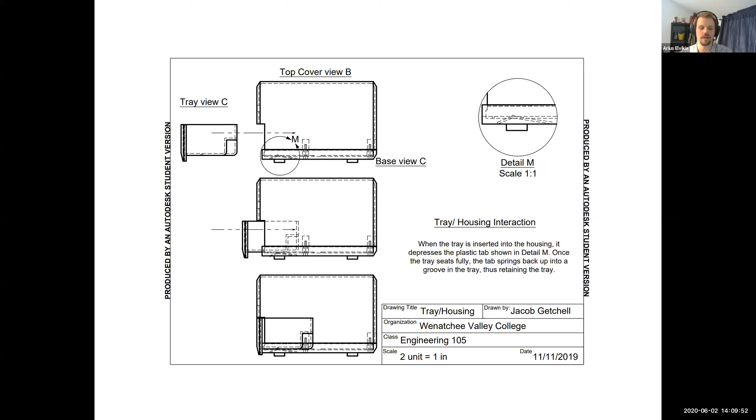So students learn what these different line types mean, and they learn how to generate these professional drawings that are kind of universal. It doesn't matter what country you're in or what language you speak, most anyone can look at a drawing like this and start to get a picture of what this pencil sharpener, in this case, will look like.

Other students are more interested in larger scale projects. Maybe they're interested in getting into construction management or architecture, the whole business of making buildings. And so you can use AutoCAD to do this.

Then most students who take that then proceed into our Engineering 106 course, which is parametric modeling, solid modeling. It's fancy words for saying 3D shapes and parts. So this is a mechanism a student built - he designed it from scratch.

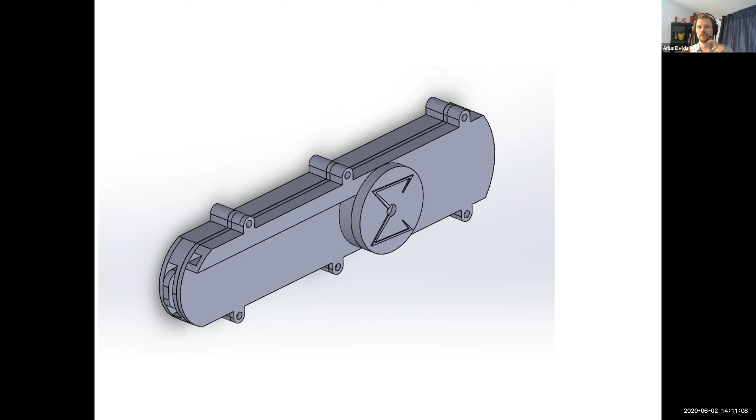He drew the blueprints in my Engineering 105 CAD class, and then when he learned these 3D skills, he built this mechanism, and it is supposed to be like a little plastic thing that you'd stick in your sleeve to shoot playing cards into your hand if you're trying to do a magic trick. So it's a design that he was working on.

He hasn't built it yet, so we don't know if it's going to work or not. But he came up with all these little sliding pieces and little gears with the hopes that he could design something like that. So that's kind of a fun application.

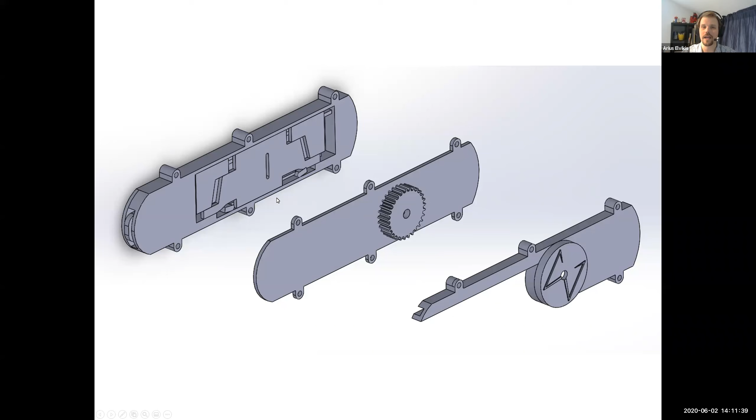But this software is very concerned that you are designing stuff that can actually be made, either by a 3D printer or by someone in a factory down the line.

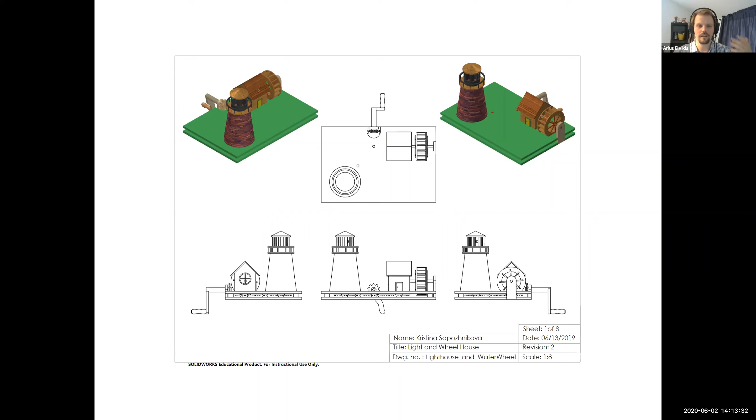So I'm showing you some fun examples and applications, and I try to open it up and let the students make whatever interests them. But we also have lots of other things that are a little more straightforward, little clocks or little turntables or little gear sets. The software lets you make whatever it is you're thinking about, and that's what I try to encourage.

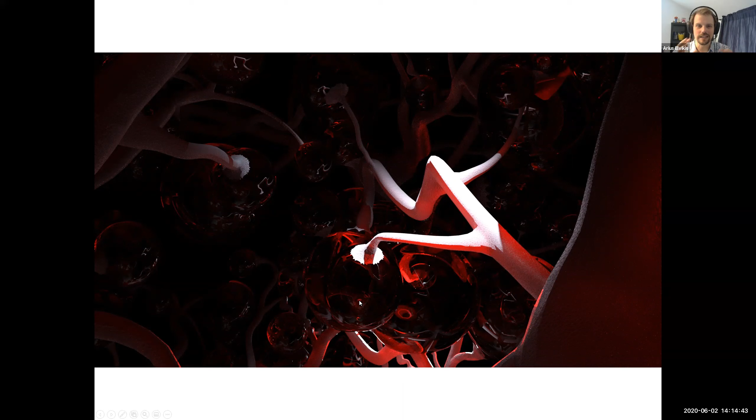The software can do all sorts of things once you learn how to use it and learn the tools that you want. So this is a bit more of a creative application of what we do.

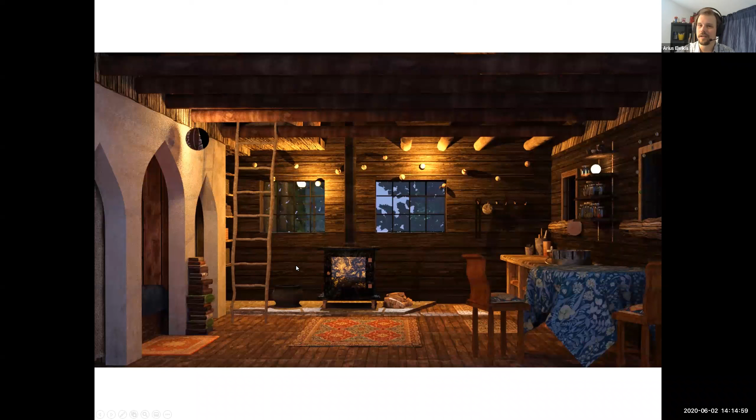This would be an example of something that's sort of halfway. Again, a very high-end student who had already taken a number of other art and design classes but didn't know the software at all at the beginning of the quarter. By the end of it, she rebuilt this kind of rustic witch's cabin with spices on the shelf, glass jars, and a little stove. Then you can see the logs in the roof and this rickety old ladder.

She built this entire virtual space that's half imagination, but also a little bit based on real cabin design and real architecture. Some pretty cool stuff, all of it using different sets of software that we work together to pull together.

My ultimate goal is that you as students can start to make the things you're thinking about or that you're trying to fix, design, or build in the first place. So that software is the first step, and I usually assume you're going to take that software and apply it to something you want to do, whether that's a future in architecture, 3D modeling spaces for projects, or little prototypes.

I've had students, one who built RC car parts in his garage as part of his side hustle, and he was able to use the software to make that process go better. Then there are students who are more interested in video games or animation. There's not a lot necessarily in that field here in Wenatchee Valley, but right over the mountains, that's where it happens.

DigiPen and the Academy of Interactive Entertainment, those places directly lead students into Nintendo and video game companies. So we can get you started and get some exposure to those software packages here at Wenatchee Valley College.

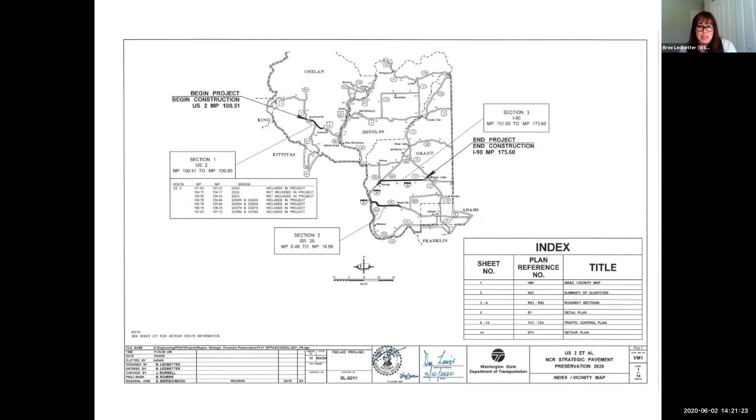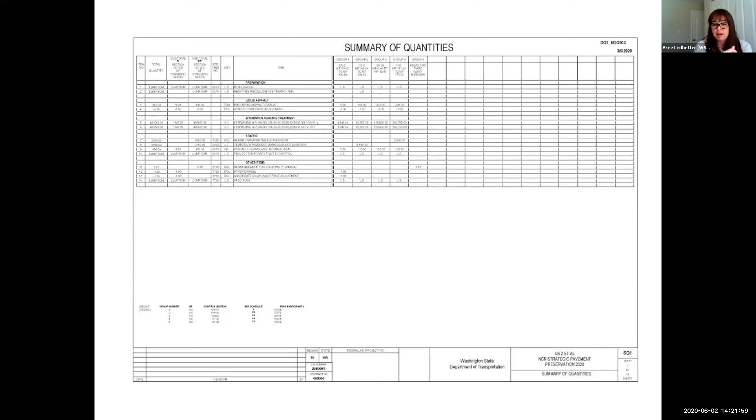The next slide in every plan set is something called a summary of quantities. This is where DOT has helped me grow my skills a little bit. I came in as a draftsman, but now we're putting together estimates for projects, and I'm learning not just to draw the plans but how to estimate quantities and what items are needed or not needed for each project. Our next slide shows some roadway sections.

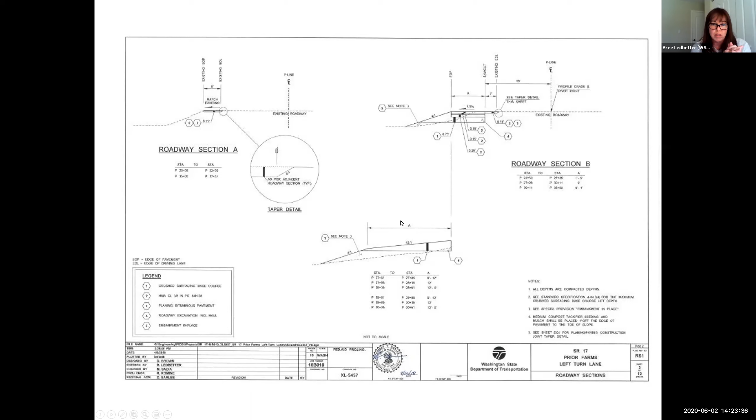What's the next one? This is going to be a site plan with a little more information. It shows all the existing roadway features, and some cut and fill lines if there's going to be anything on the side of the road they'll have to cut into, like the hillside or the ditch.

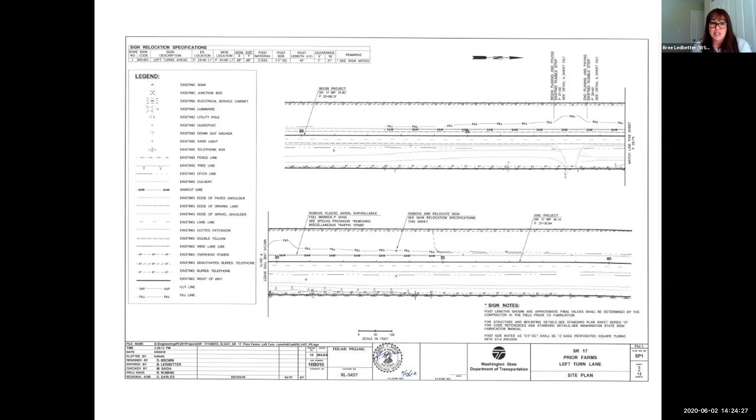Some of these plans will also show electrical stuff like buried fiber or utilities. We have different departments at the Department of Transportation — our traffic office does more of the electrical design for intersections, and then we have a survey office that goes out and gets information you can reference in your drawings.

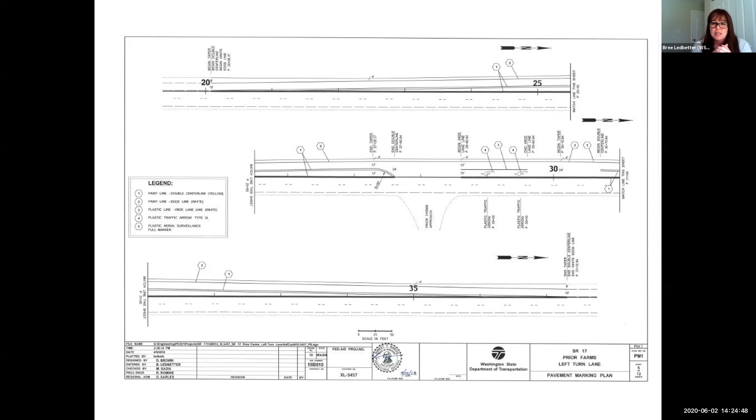I think the next slide might be electrical — oh, this is the pavement marking plan. This is also something the traffic office handles. There are different offices you can work in depending on your specialty. There are all kinds of drafting standards, and standards for what has to be out there when designing roads. This shows all the pavement markings and where they go.

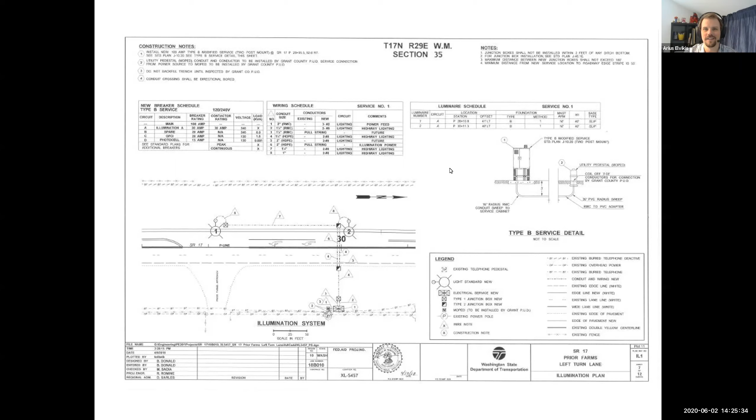The next slide, I believe, is the electrical illumination. Arius talked a little about electrical design — this probably isn't exactly what he did. Students taking electrical for us usually use CAD to do more abstract flow charts, like locating a capacitor or a resistor. But this is the civil application, where you have to think about where that conduit is actually going to run, and coordinate with all the other offices about where it's going and coming from.

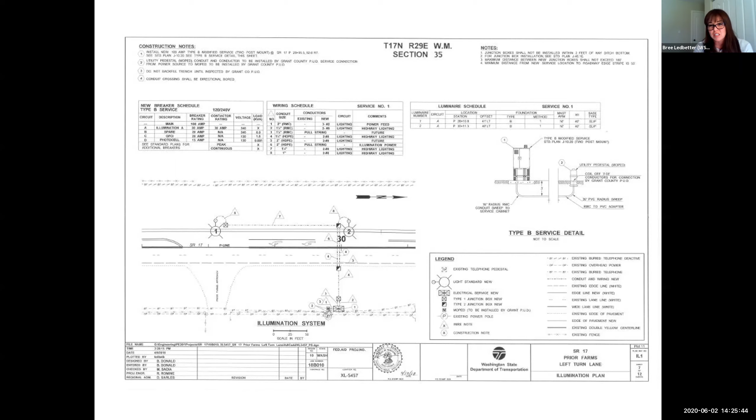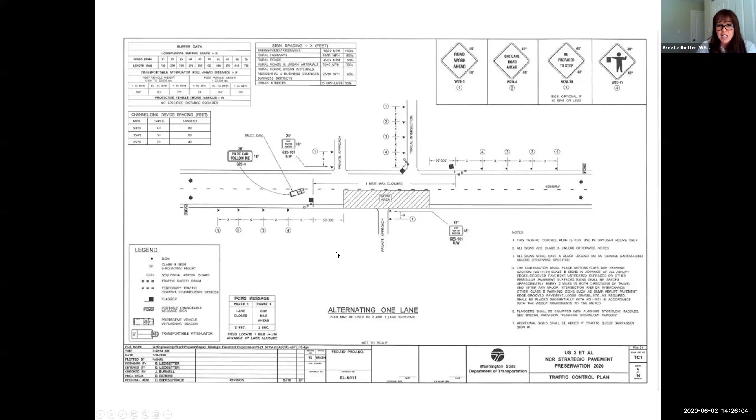So these are just examples of things in our plans. The next one I think is traffic control — a lot of times traffic control is almost the majority of our plans. It's very important to the DOT that people get in and out of our construction zones safely. There are charts for all the different taper rates and that kind of stuff — you can't just throw something in there willy-nilly. If somebody's going 60 miles an hour, the taper is going to be longer than if they're going 25 miles an hour.

And lots of signs — lots and lots of signs. We have people blowing through the construction sites all the time, so a lot of effort goes into keeping the employees safe.

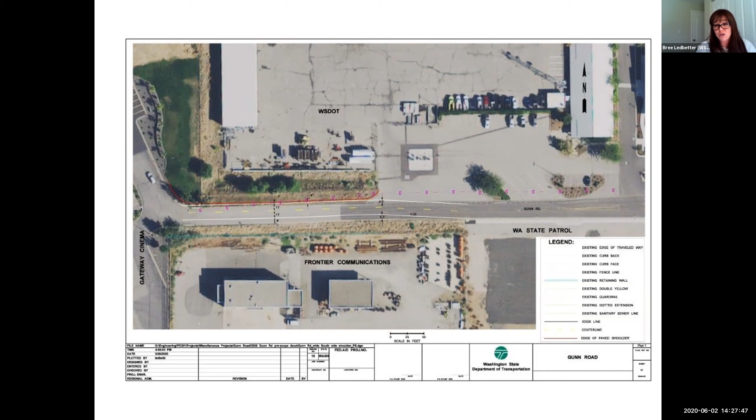But these are other things that we get to do with AutoCAD or MicroStation software. So that's a little bit about what we do at DOT, or at least what I do. I don't know if I want to throw it back to you, Arius.

Sure, yeah. So that's really cool to see that stuff in action. In my starting classes, we have so many different students hoping to do different things. But some of them know about civil engineering, they know someone's got to think about bridges and dams and things like that. AutoCAD is the industry standard, but there's lots of comparable pieces of software that do similar things. And Bree, when you said you had to learn a new set of software even though you trained on a different set, that's how it goes.

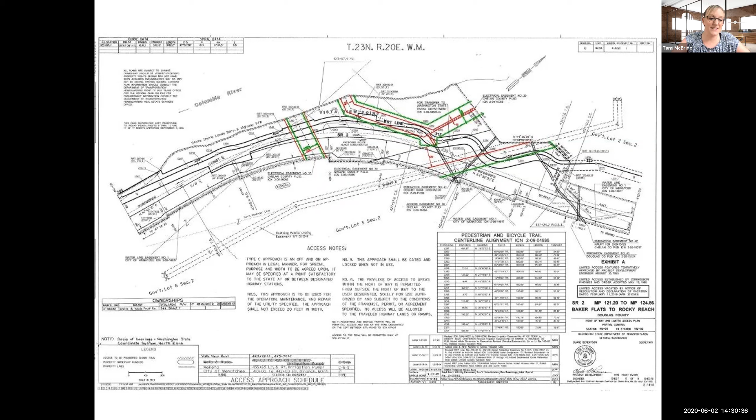The question said, would you recommend a certain level of math skills for high schoolers to have if they were to pursue a career? Well, I can speak to what would be required to get a certificate or a degree. For most of our certificates, the requirement is a Math 100T, which is a 100-level college math specifically geared towards technical students. It's much more practical - they find ways you would use math in business, in an orchard, or on a construction site, and they try to make it very practical.

If you're interested in pursuing one of those bigger engineering degrees - and Bree, I don't know what the math requirements were for your drafting program when it happened - once you get into a 2-year degree, you're going to have higher level math. To become an engineer, I'd love to hear what Bree has to be doing now to prove her engineer-level math. That can start to go up pretty quick. But as long as you're still on the machining, welding, or just technical drafting side, the math doesn't get crazy.

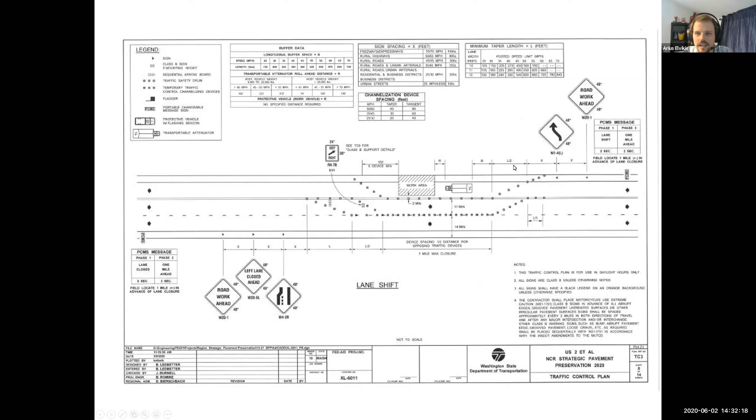It's very geometric. So if you can sort of see a 3D form in your mind and understand how long this side is versus that side, that's better. And when you look at all those blueprints, if I pop back up here, you can see there's distances in these dimensions, right? So you've got to be comfortable with distances and estimation.

If I go way back to some of my floor plan layouts here, right? Sometimes you're not going to see a distance. I've got this overall distance of 42, and I've got all these smaller distances, but if I needed to know this distance right here, looking at the right side between the walkway, the staircase, and the master bedroom door, it doesn't say how far it is, but I have all these other dimensions all over the place.

I'm going to have to maybe just do the arithmetic in my head. So if you can have a handle on popping out a calculator, be able to make sketches and determine what the differences are between certain numbers, that's about as formal mathy as it gets in terms of starting to learn the software. But once you're at Bree's level and you have to worry about whether this structure is going to hold up this gravel or not, then I think the math goes woo.

Oh, and when I took the drafting class, the math, of course, was really low. It was not a degree, so the math was really low. But that's kind of the DOT, like I said.

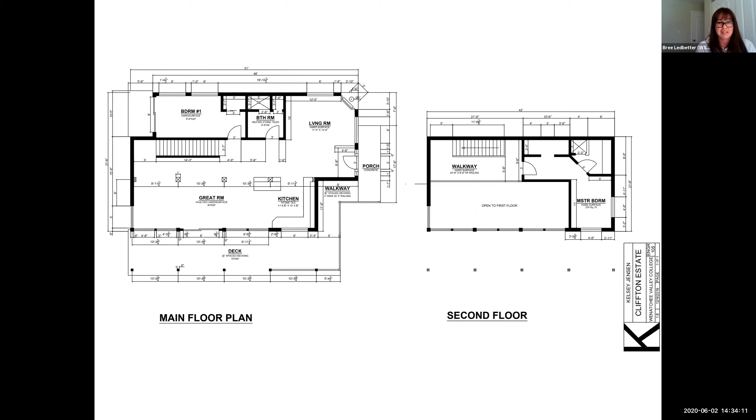I think when you get hired on by a company, if you have very low experience, you want to talk to them about that. I have learned so much in the 13 years that I've been working there, and had so many great people to help me through those math calculations. There's tons and tons of different manuals and that kind of stuff to figure those things out. But really, the people at DOT have all been teachers to me. So that's been wonderful for me.

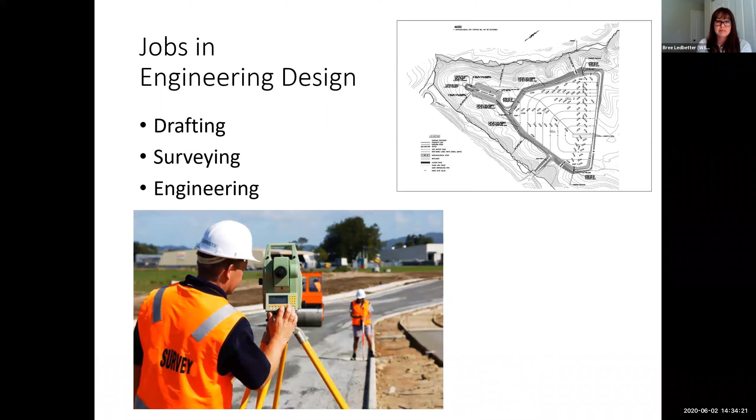Yeah, I've heard that a lot, that most places, if you can show that you're taking these classes, that your grades are okay, that your attendance is good, that you're paying attention, and the instructor can vouch for you, I think a lot of businesses in our valley especially are excited to home grow young people and will give you the specific training.

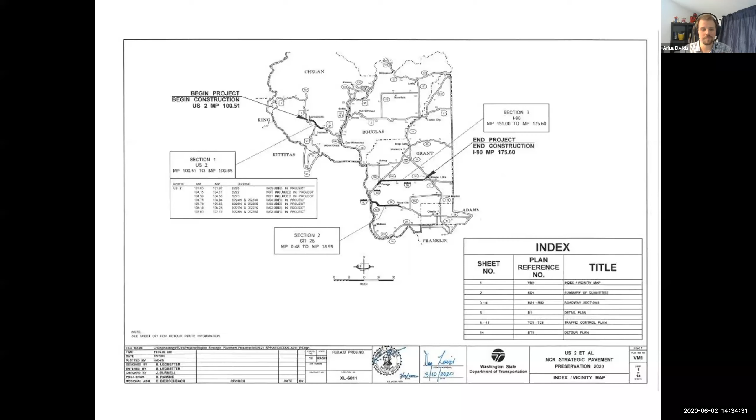Bree, when you showed this one with the roadway section, so even though it's drawn in 2D, we're seeing these slices, and then we look at it from the top view another way. Do you feel in your mind, Bree, that there's like a 3D box or something? Do you see this stuff as it is in the real world, and then you can interpret it into 2D, or how do you describe that mental process?

Definitely. I mean, well, and drawing roads, of course you can see them. You just look out the window and you can see it, you can picture it. But really picturing it, the 3D in your mind is huge to being able to draw the cross sections or the plan view, that kind of stuff.

Yeah. So I asked that because maybe a student's not feeling really good in their math classes because it's abstract and there's equations and you kind of get what X is supposed to equal, but it's sometimes hard to plug it in. Every step of the way in these drawings, you're seeing the numbers, you change a number, the line changes, you change the line, the number changes. And so it's all linked together. And I think that makes it easier for a lot of students to start grasping the math that you need for this kind of stuff.

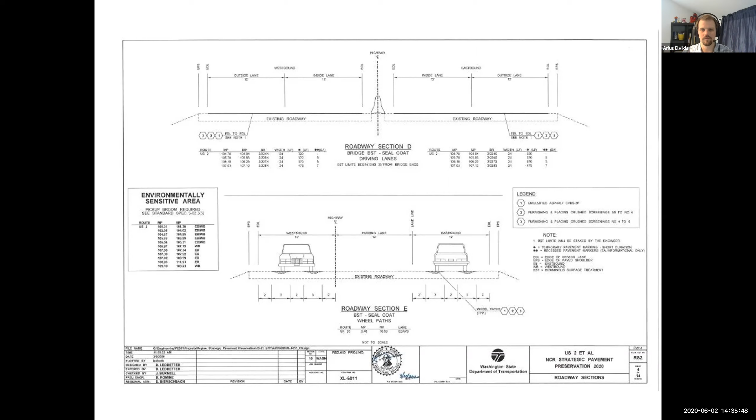But again, if you're building a bridge, you need a lot more math. You need calculus and a lot more math. Here, once in a while, you might get a pickle of figuring out an angle on a triangle, right? So you want good geometry, maybe a little bit of trigonometry here and there, but you can learn that while you're learning the software. You don't need to know it before.

Yep. And the software, honestly, I'm still learning after 13 years. There's shortcuts and different things that you don't use every day, and then somebody else comes over and shows you how to draw something new, and they use their own little shortcut that they have, and it opens up a whole new world. The software is just so big and can do so much stuff that, I mean, the introductory classes are great, but you're going to learn so much more even after that.

My last comment on that front would be the goals for my classes, and certainly for any of the certificates, is that by the end of it, you've got that packet. You designed your little magician's card device, or you mapped out a new back porch or a new garden arrangement for your front yard. And you can depict that when you go in and talk to a company and want to intern, and you can hold that folder to them and say, here's the stuff that I drew in these classes. They're going to see it. That's an immediate, real, tangible thing. And that's where I try to get students.